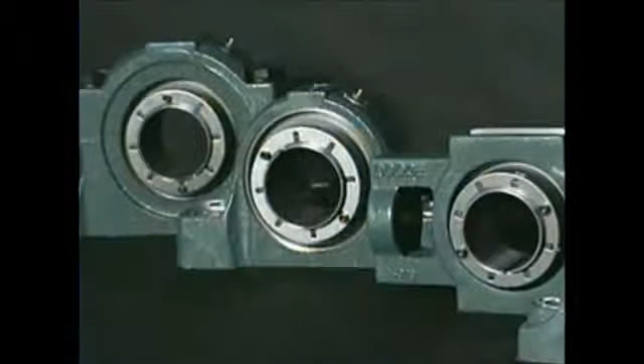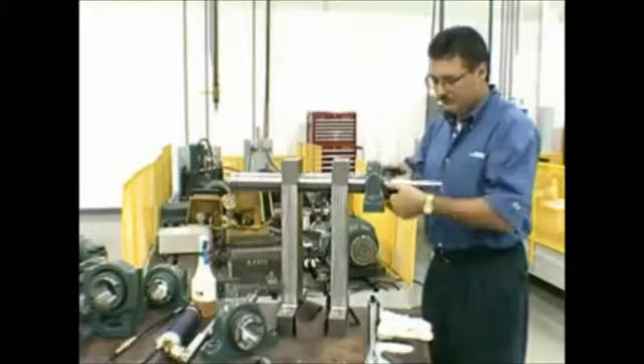The Dodge Imperial line of bearings are adapter mount spherical roller bearings, which incorporate a unique mounting and dismounting method. Rotation of the lock nut clockwise mounts the bearing, and rotation of the lock nut counterclockwise dismounts the bearing. This revolutionary method is exclusive to the Dodge Imperial line of bearings and has been patented by Rockwell Automation.

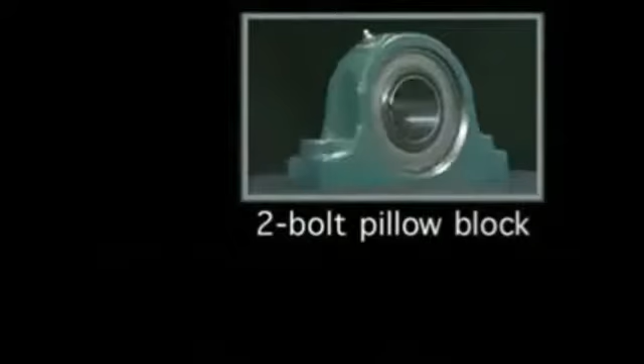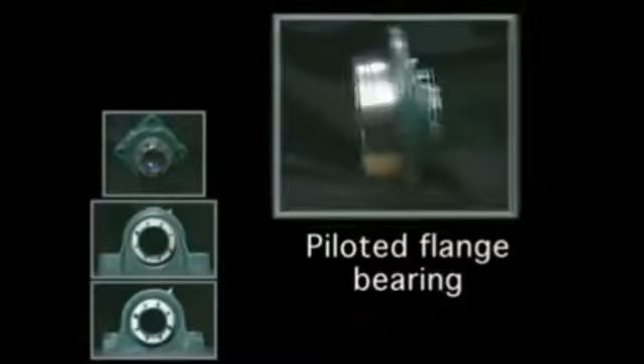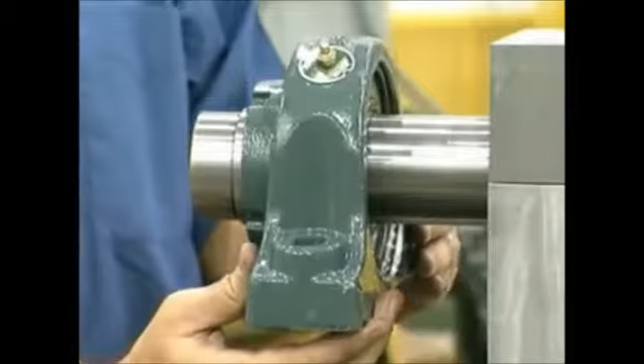Different housing configurations are available, including 2-bolt pillow blocks, 4-bolt pillow blocks, 4-bolt flange bearings, piloted flange bearings, wide slot take-up bearings, and the latest version split cap ISAF pillow block. All these housing variations are available in expansion and non-expansion designs.

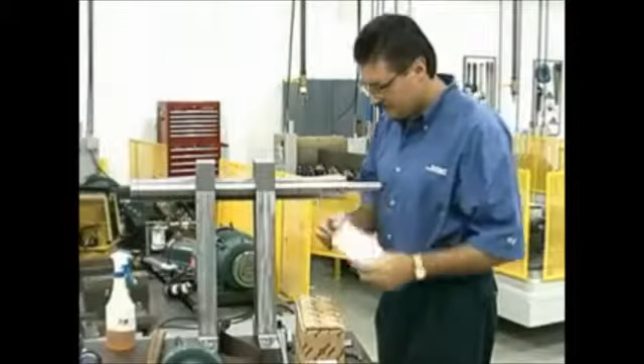Preparing for bearing installation. Prior to bearing installation, inspect the shaft to ensure that it is smooth, straight, and clean. If a nick is found, remove the raised area with a file. Next, use an emery cloth, sandpaper, or Scotch-Brite to clean all fretting, corrosion, and fine nicks from the shaft.

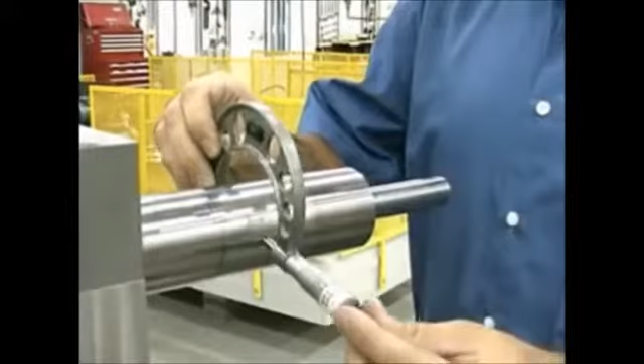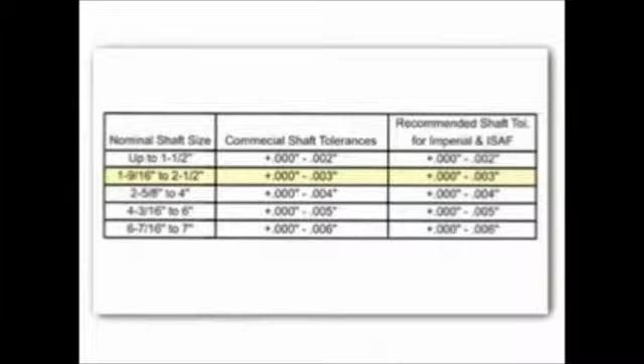Now, ensure the shaft is within commercial shaft tolerances. Due to our adapter mount design, standard commercial shafting tolerances can be used. This chart reflects the recommended tolerances. We will be mounting a 2 7/16 inch Imperial IP bearing, which requires a shaft diameter of 2.4375 inches with a tolerance of nothing minus 0.003 of an inch. Next, apply a coating of light oil or other rust inhibitor to the exposed shaft surface to prevent corrosion.

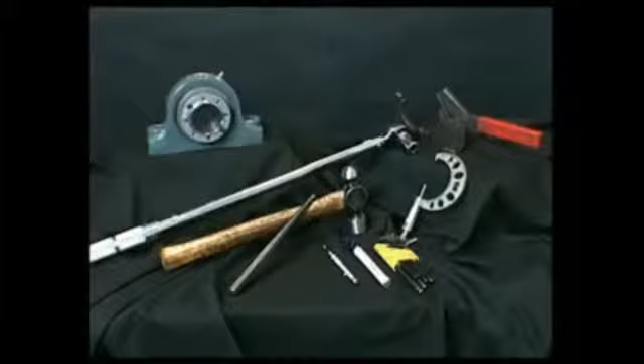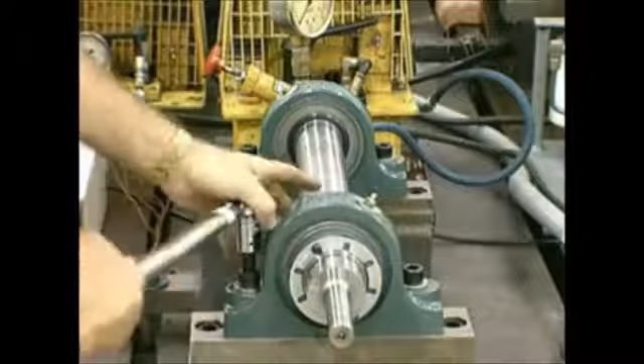The tools required to mount the Imperial line of bearings include an Allen wrench, drift and hammer, marker, a mic, and a torque wrench to tighten the base bolts once the bearing is mounted. Rockwell Automation also offers an Imperial impact spanner wrench to simplify the installation process.

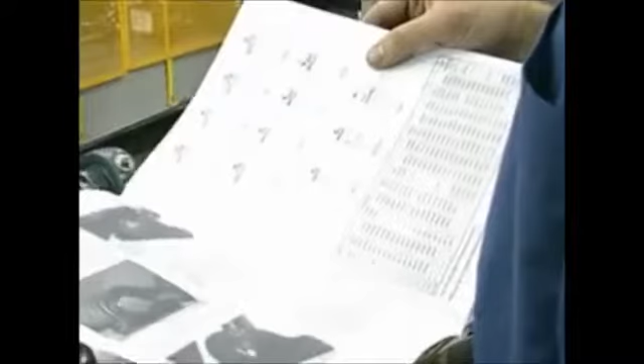Remove the bearing from the box and packaging. An instruction manual is supplied with each bearing and should be read prior to mounting. We will be mounting a 3 7/16 inch Imperial IP pillow block bearing. A typical application requires a 2-bearing system in order for the application to operate properly. It's recommended that a fixed bearing and a float or expansion bearing be used.

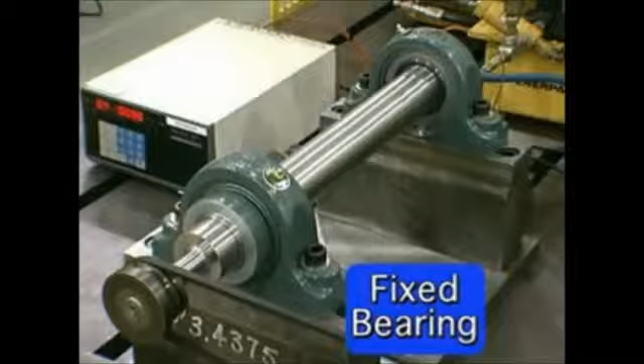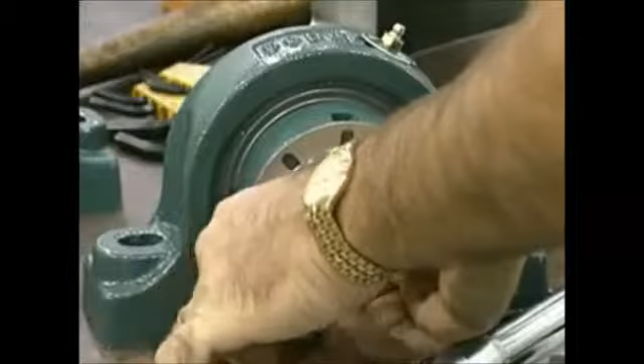The fixed bearing should always be mounted first and is typically mounted on the drive side of the application. The float bearing is mounted last for positioning purposes. The bearing is equipped with a lock plate, which is secured to the face of the lock nut. Remove the button head cap screws using an Allen wrench. Remove the lock plate and set it aside. We will reinstall the lock plate after the bearing is mounted.

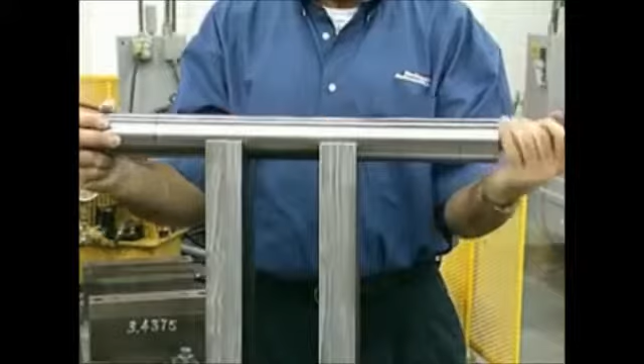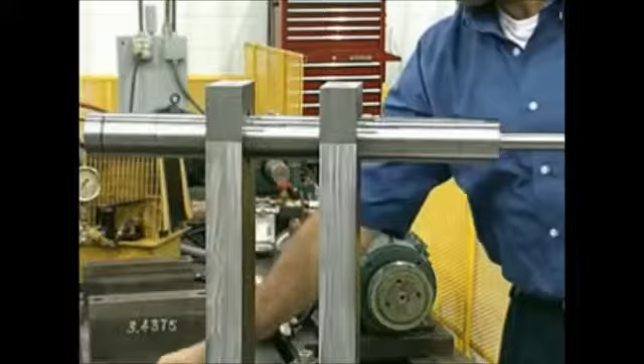All adapter mount bearings require weight to be removed during mounting to ease bearing drive-up and to minimize the mounting force. This can be done via a sling, jacks, or, as in our case, using supports. Rotate the lock nut counterclockwise 1 to 2 turns while holding the adapter sleeve. This will allow the adapter to fully expand.

Slide the bearing to the desired position on the shaft. If the bearing does not slide onto the shaft easily, loosen the lock nut another 1 to 2 turns and repeat the process. Now the bearing lock nut needs to be tightened to its zero reference point or starting position.

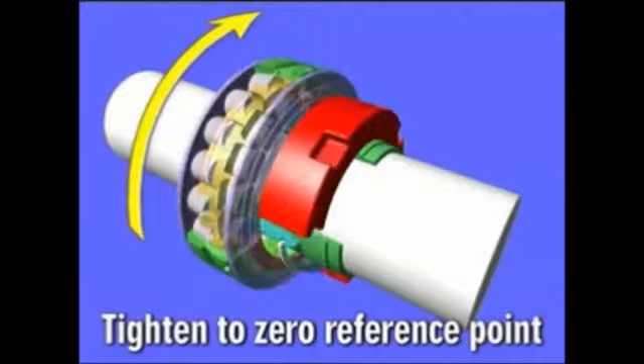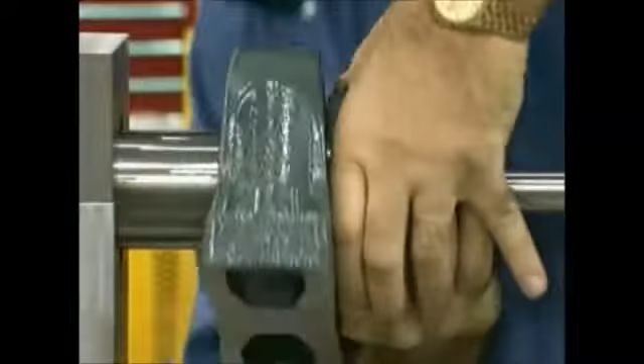The zero reference point is defined as the point when the clearance between the adapter sleeve, shaft, and bearing bore is removed, and all mating surfaces are in metal-to-metal contact. This is achieved by tightening the lock nut clockwise, using both hands until the lock nut can no longer be rotated by hand.

Once the zero reference point is achieved, scribe a line on the face of the lock nut and adapter sleeve. It is good practice to scribe the lock nut face in line with the slot on the adapter sleeve. Next, determine the appropriate amount of lock nut rotation required for mounting. This information is shown in the instruction manual supplied with the bearings.

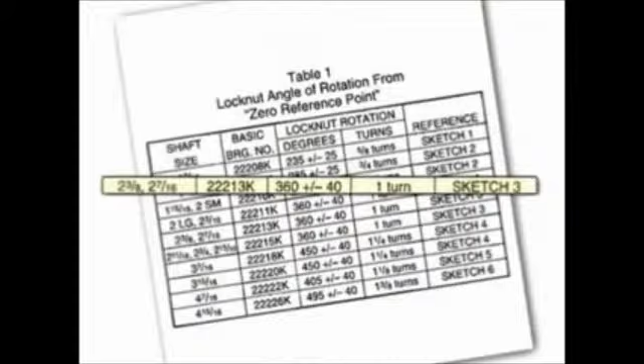In the case of the 2 7/16 inch Imperial IP bearing, the rotation of the lock nut from zero position is 1 full turn. Rotate the lock nut 1 full rotation from the scribed zero reference point. Once the full turn is achieved, the bearing is mounted.

To confirm that bearings up to 2 15/16 have been mounted properly, you can check the number of threads exposed on the adapter. There should only be between 0 to 1 thread showing. On larger bearings, 0 to 2 threads is normal.

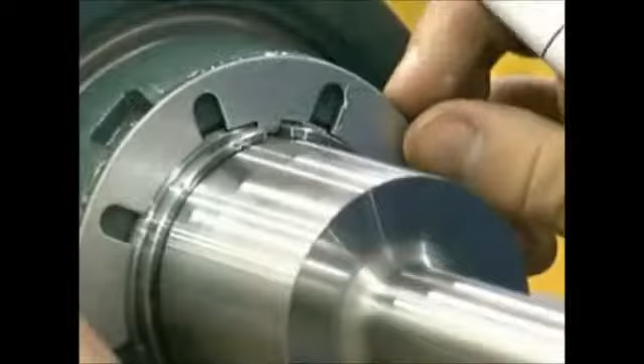Next, slide the lock plate into position by aligning the tang of the lock plate with the slot of the adapter sleeve. Find a lock nut hole that aligns with the lock plate hole or slot. If the closest lock nut hole is beyond a lock plate hole, scribe the adapter at the next closest lock plate hole. You need to tighten the lock nut to meet with the lock plate hole or slot.

Next, insert the lock washer and button head cap screws into the lock plate. The fixed bearing has now been properly mounted to shaft. We will now mount the float bearing.

The Imperial IP, ISAF, and metric ISN float bearings are mounted the same way as fixed bearings. The only difference is the positioning of the housing with respect to the bearing to accommodate shaft growth due to thermal expansion. Follow the same mounting procedures as the fixed bearing as shown in the previous segment. Once the bearing is properly mounted, it now can be attached to the mounting structure.

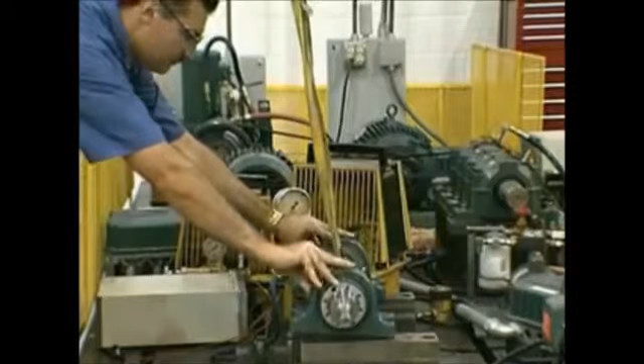When the bearing and shaft assembly is placed into position, insert the base bolts into the fixed bearing and tighten them by hand. Then insert the base bolts into the float bearing, making sure that the float housing has been shifted in the correct direction so it will accommodate shaft thermal growth.

Next, make sure that the bearing housings are aligned by the use of a straight edge or laser. At this point, we are now able to torque the mounting bolts to their required torque values. The bearing assembly has now been properly mounted.

Relubrication of Imperial IP, ISAF, and metric ISN bearings. Grease fittings are supplied with each bearing for relubrication purposes. The bearings are pre-lubricated at the factory with lithium-based grease and should be relubricated with a compatible grease. The standard grease fill out of the box is 30 to 40% full.

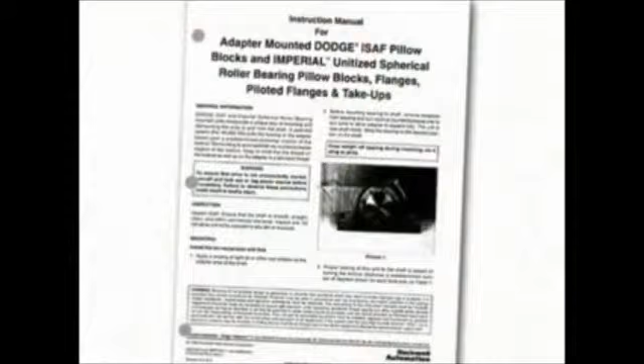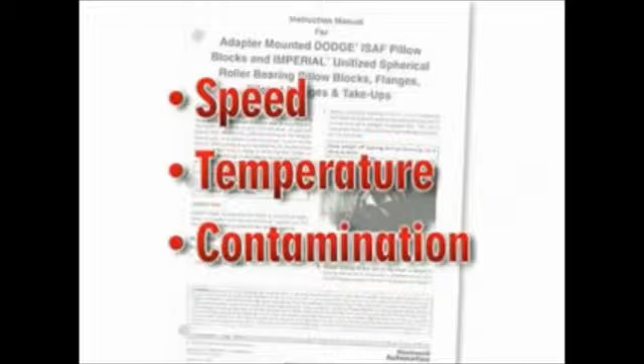Due to various operating conditions such as speed, temperature, and contamination levels, relubrication intervals vary, and the instruction manual should be used as a reference guide. Bearings should be relubricated while in operation if possible. This can be done with the use of a standard handheld grease gun.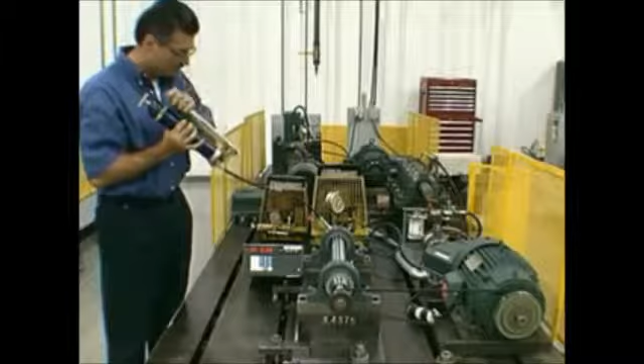Greasing during operation is done to guarantee equal grease distribution throughout the bearing and to minimize temperature rise, which occurs with relubrication. A good rule of thumb is to continue to add grease until fresh grease is seen purging past the bearing seal. In the Imperial line of bearings, seals are designed to purge excess grease from the bearing as the internal bearing pressure increases.

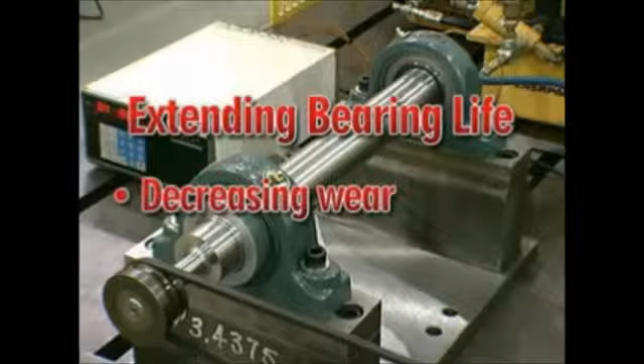There will be a temperature rise, which you can see with the aid of a thermocouple inserted in the bearing housing. As the excess grease and the remaining grease is channeled and distributed throughout the bearing, the temperature will decrease and stabilize. We have accomplished two very important requirements to achieving long bearing life. First, we have introduced fresh grease to the internal surfaces of the bearing, which help prevent bearing wear, and second, we have purged contaminated and deteriorated grease from the bearing.

Dismounting Imperial IP, ISAF, and metric ISN bearings. To dismount the bearing, first loosen the base bolts. Now remove the weight. Next, remove the button head cap screws and lock plate.

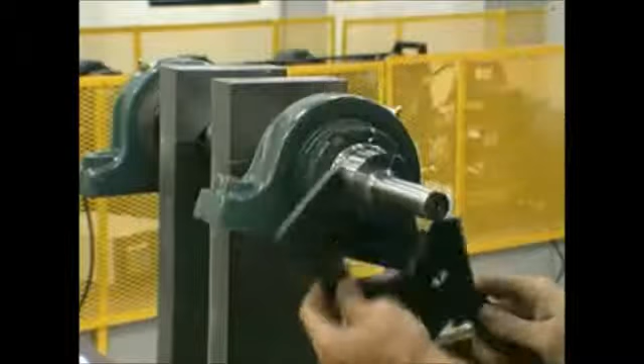Now begin to rotate the lock nut counterclockwise using a drift and hammer or the Imperial impact spanner wrench. Continue to drive the lock nut counterclockwise until the bearing is released from the shaft. The bearing has now been properly dismounted.